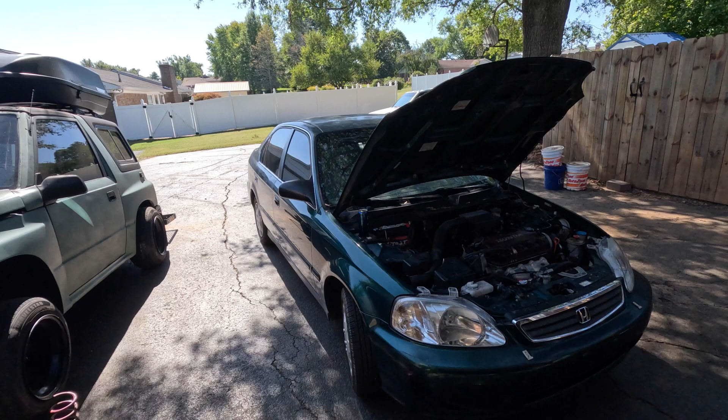$19.99 Honda Civic LX. All right, first things first, we're gonna remove this. Let's get this out of the way. It should just slide right out. Fits in there nicely like a glove. Set this to the side.

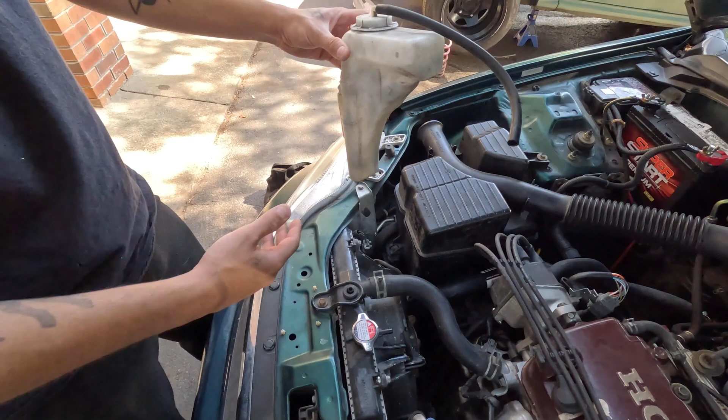Let's remove the upper radiator hose. Get this hose off, line off. Hose off right there. It's not leaking because my radiator's empty. Leaked all out the night prior. Set that to the side.

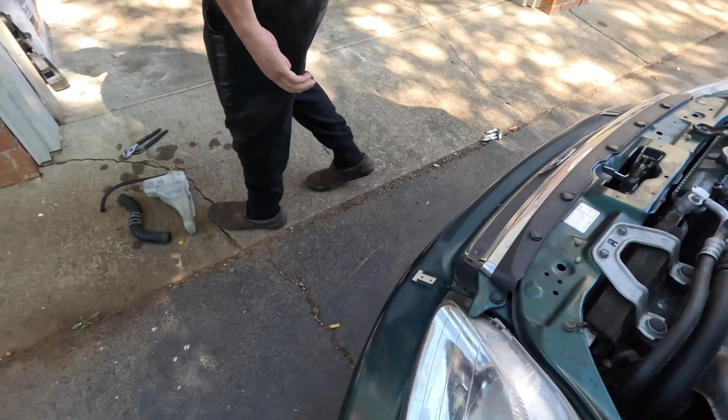Now we're gonna get the lower radiator off, and the lower radiator hose off.

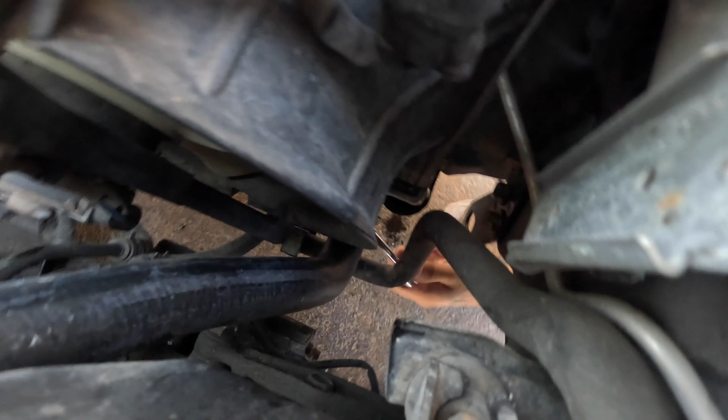I use a hose clamp for this. I don't really like using the ones where you pinch. I like to have this one German specs. Does that make sense? Guten Tag.

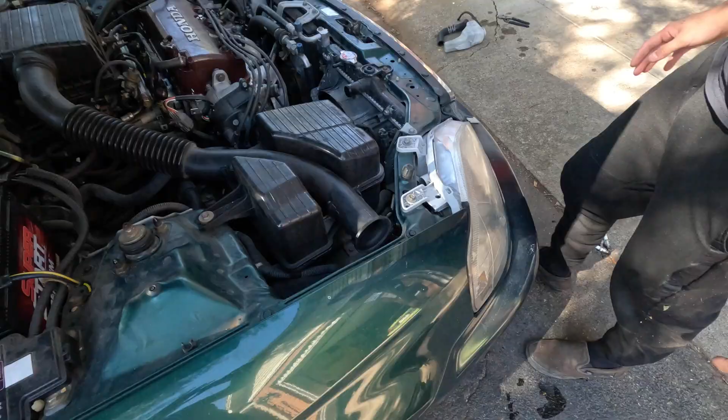Hey, I took the whole thing off. Maybe too much. Oh, son of a bitch! Oh, there wasn't much anyways. It stopped already, I'll be fine. You get some oil dry.

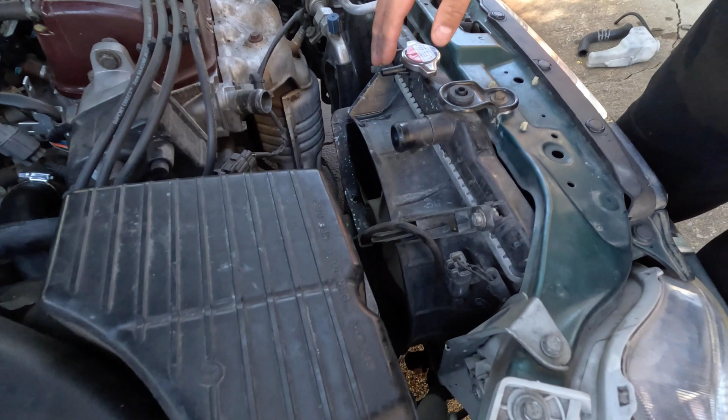So just make sure you got all the coolant out of your radiator before you make a mistake like I did. I thought I drained it all out yesterday, but I guess sitting overnight it just kind of built up. But it's okay, mess is clean.

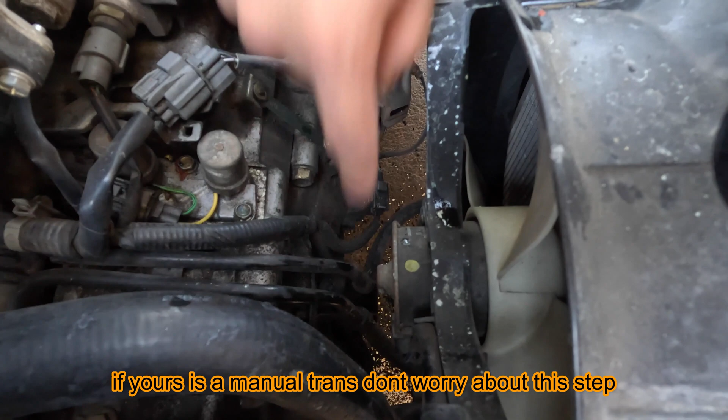So now what we're going to want to do is to see these two transmission cooling lines right here. Let me show you how to go about taking those off and plugging them properly.

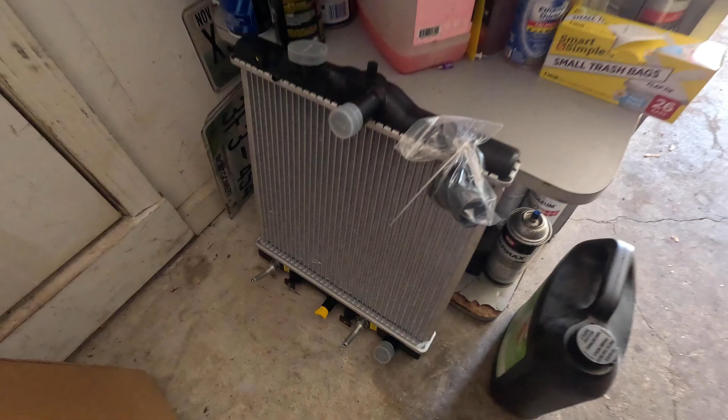Came with a new radiator on here, so it's perfect for plugging that line so you don't leak any transmission fluid. But, I mean, you're gonna leak a little bit, but it'll be all right.

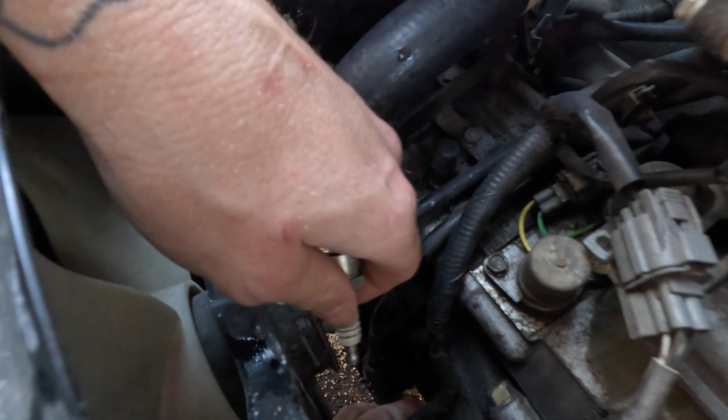Once you get this line off, you want to use a spark plug. What we're gonna do is plug this line right here to keep it from leaking transmission fluid. So I'll let you do that. Yeah, this is gonna be hard. Might lose a little bit of fluid, but that's fine.

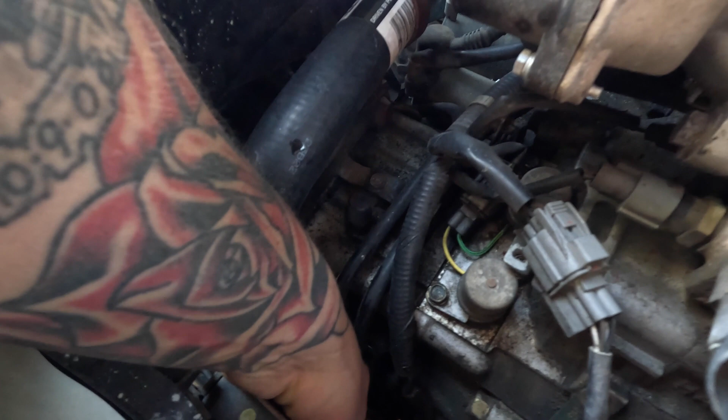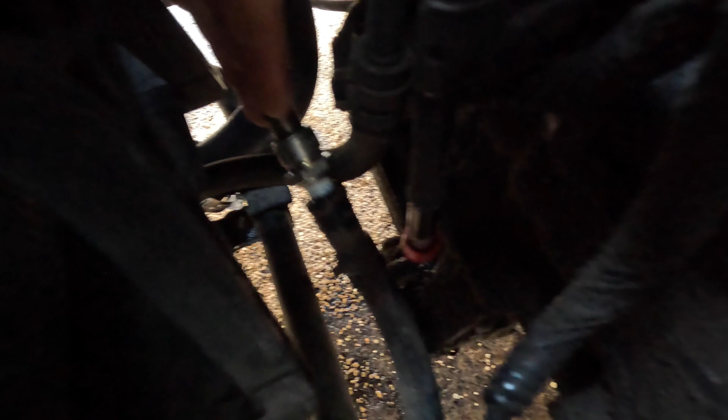And then this cap came with a new radiator. Put this cap along the... like that. First one's done. So what we did is we took the line off, plugged it with the spark plug, and then these little red caps right here came with the new radiator.

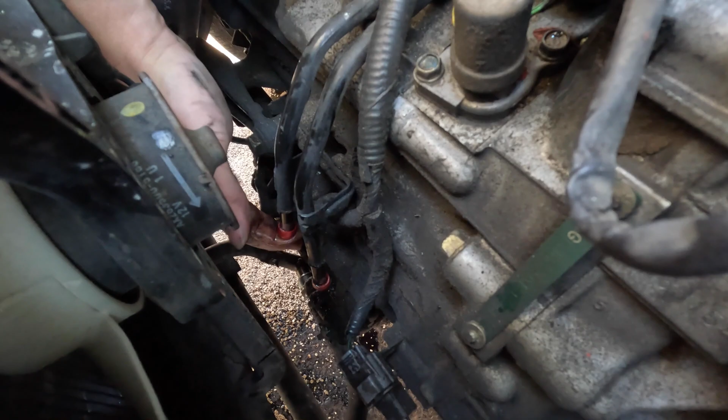Cool, there you go, mechanic. And it's just a little bit of transmission fluid. You'll be fine, but it doesn't hurt to check it after you're done.

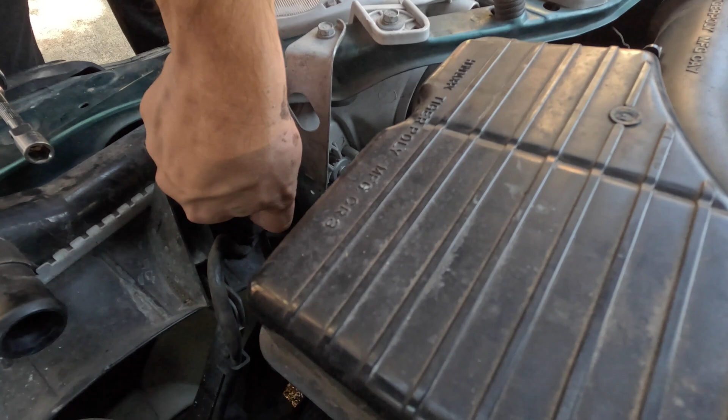So that's also what we're going to be doing. So since we got those two off now, we're moving on to taking this off, which I hate plastic clips. There you go. The only thing holding this radiator in place is this 10 mil bolt right here, but there you go.

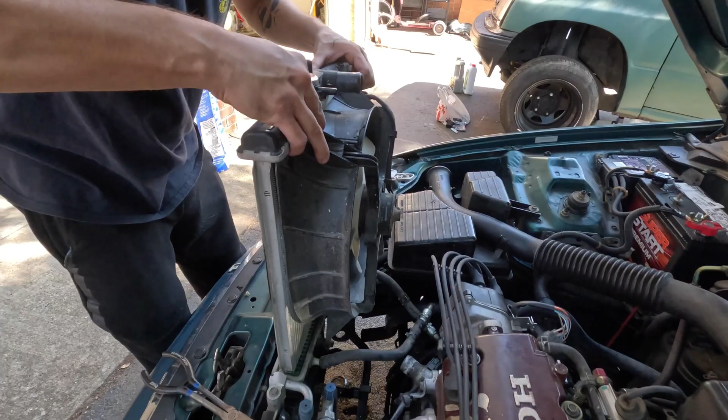Set this aside, don't lose it. And then your radiator should just come right out. Voila. Yep, and she's out. Bam.

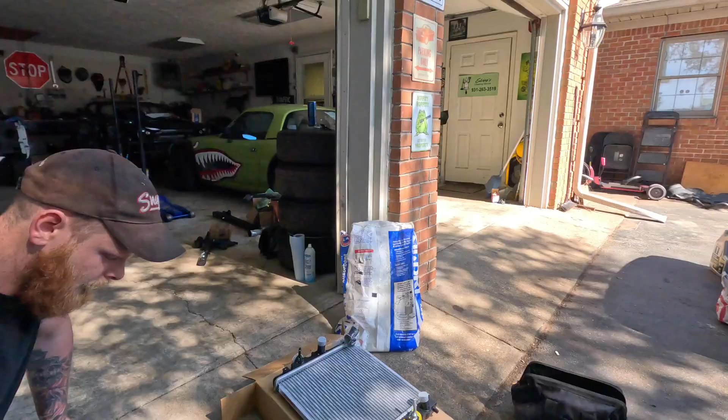Now what we're gonna do is we're gonna basically transfer everything over from this to this beautiful new one. We're taking off the fan right now. Couple 10 mil bolts.

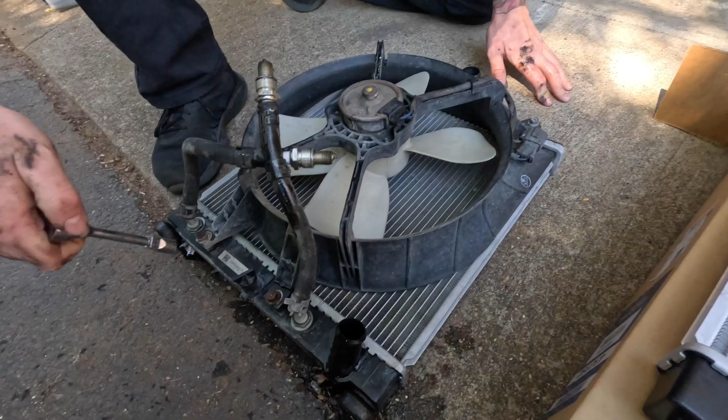Yeah, you can tell that it's been leaking because these are rusty.

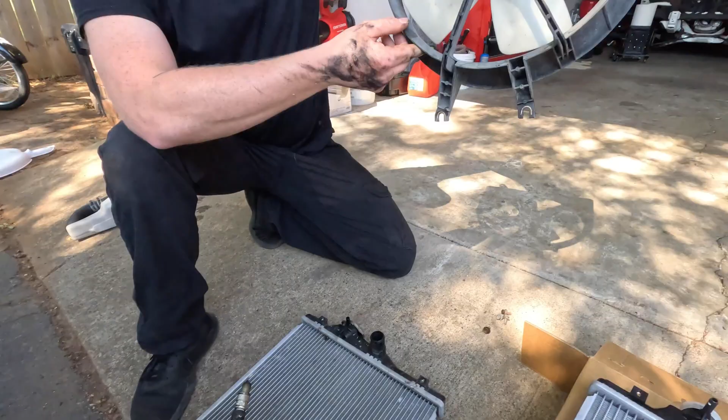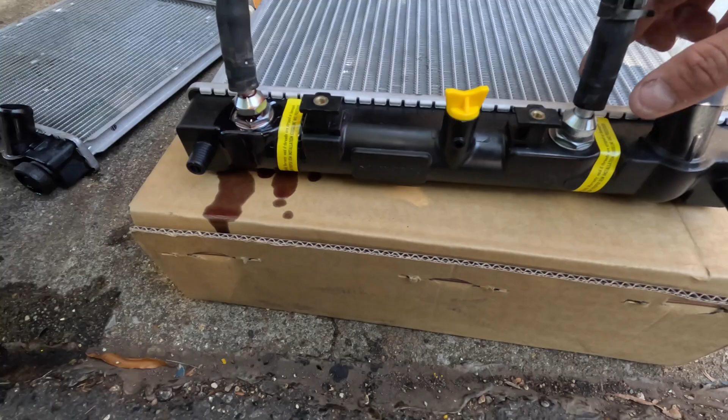So a lot of people, when they tighten these, some people use thread tape. You don't have to, just make sure it's good and tight, German specs, good and tight. And then make sure it's pointing in the same direction as it was when you originally took it off. Just like that. So these are already tightened and had them pointing upwards. We're good to go.

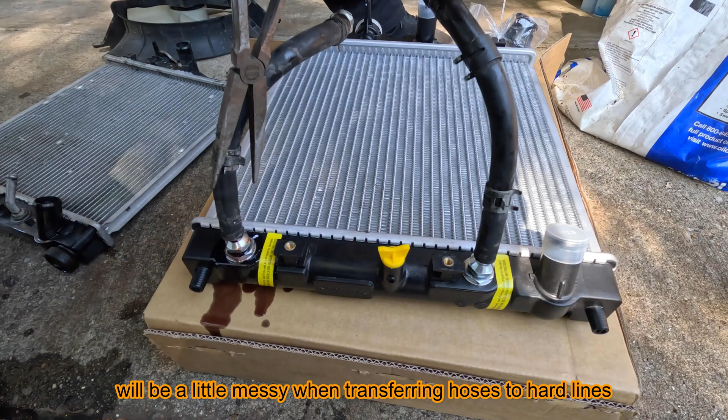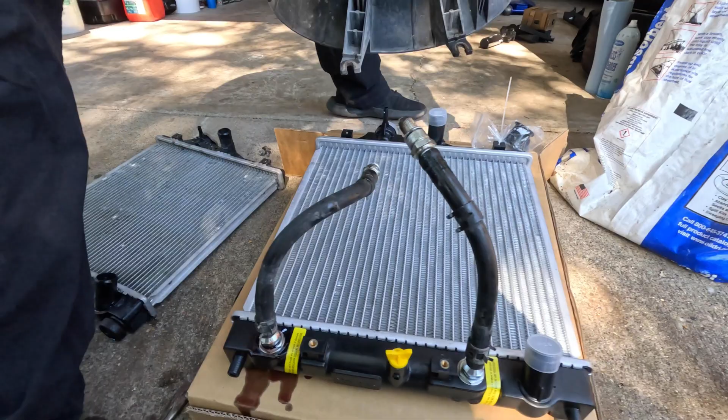German specs. Now I'm gonna install the fan.

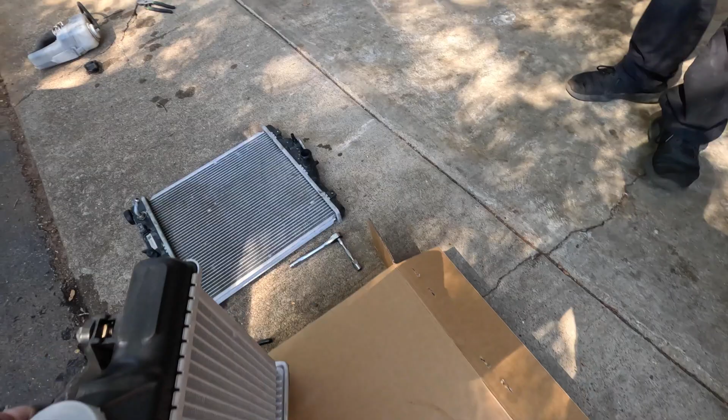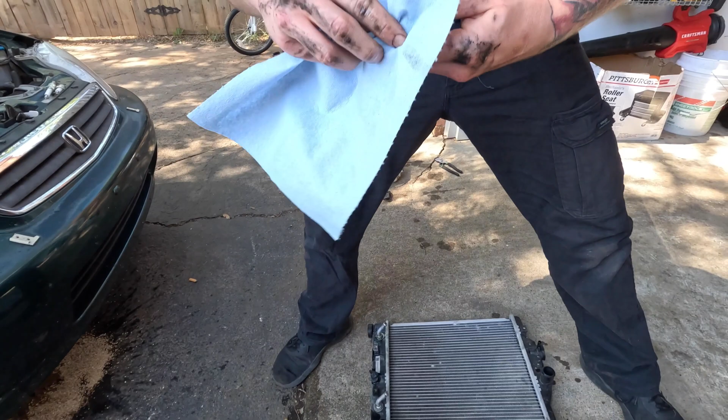And a lot of the times, some of these newer radiators, they don't come with the radiator cap. Can you grab that one off of there for me real quick? So keep that in mind, don't throw it away just yet. There we go.

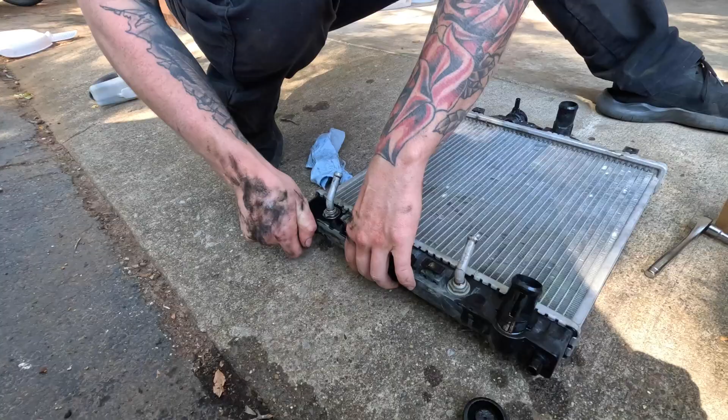And we're going to be using the grommets that were on the old radiator compared to the new ones, because this is what the new ones look like in reference. They're not the same, so we're just going to reuse the old ones.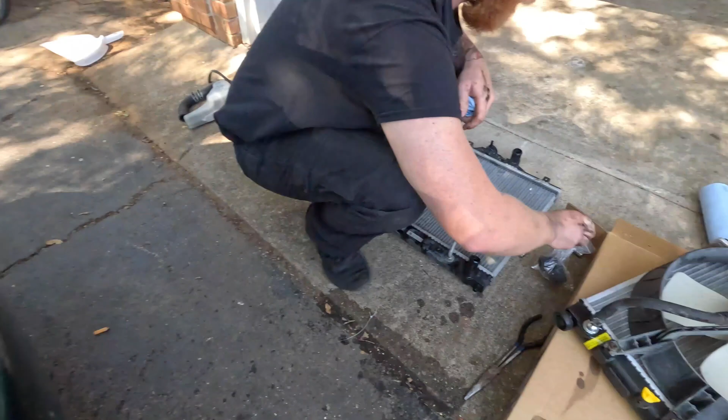Now we're going to go on the install. So those two little grommet things slide right into there. Too easy.

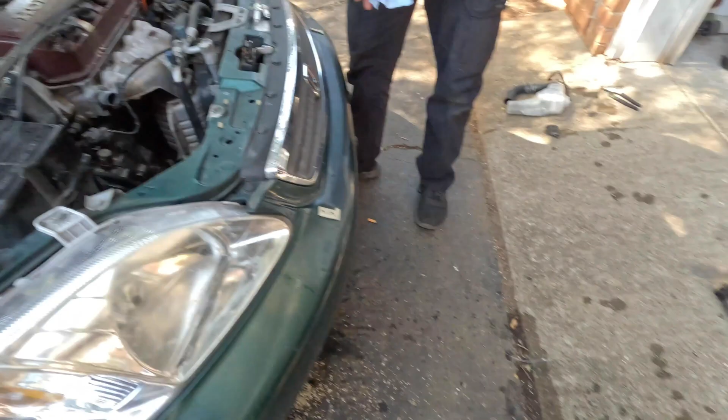So just slide right in like magic, like butter. Let's do it. That side's in, that side's in, there you go. Too easy. Now what we're gonna do is that little, just to hold it in place. Catch that.

Teamwork makes the dream work. Let's do it, let's do it. Save you a few hundred dollars doing it yourself. Save 15% or more by doing it by your fucking self. Watch your profanity. Oh.

Alright, next thing we're gonna get into, yep connect that. I hate sensors and plastic plugs and all that shit.

Next thing we do is to connect those transmission cooling lines. And like I said, if you leak a little bit of trans fluid, that's fine, because we're also gonna check it after this.

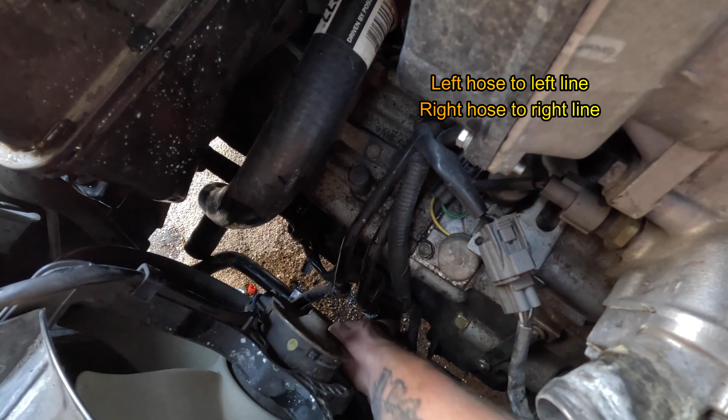There you go, I'm just gonna get the clamps on. Now we're getting the clamps on. Damn, this guy is literally a genius, dude.

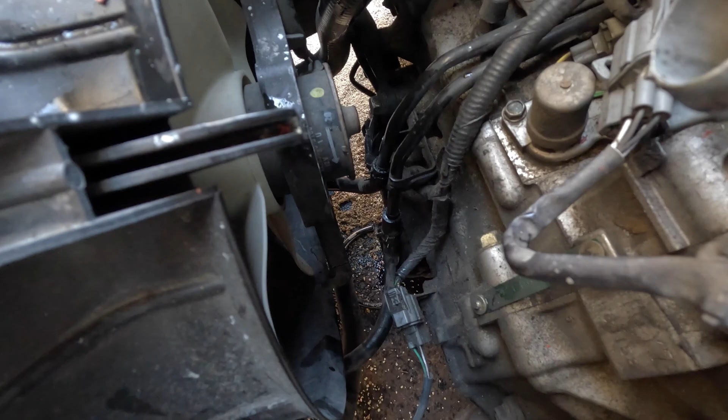I did work as a mechanic for a little bit. Oh, fuck, come on man. Hey, at least it touched the ground - that's all you really look for whenever something falls in the engine bay, you want to hear it hit the ground. There you go, good job.

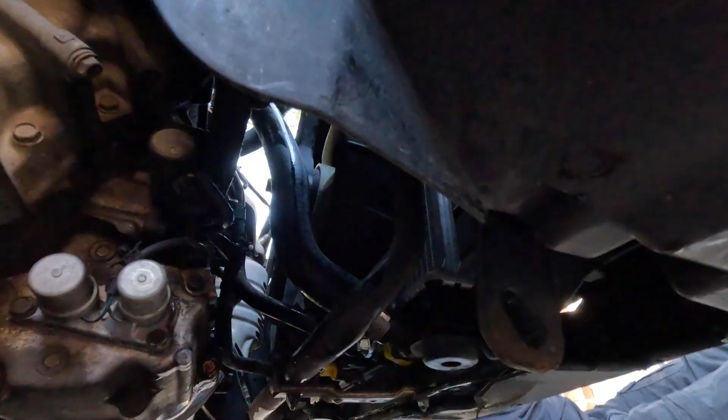And the hoses. Now you're going to connect your upper radiator hose. Good job. And then you go about getting that lower radiator hose on. Make sure you got it good and tight - not too tight, but tight enough.

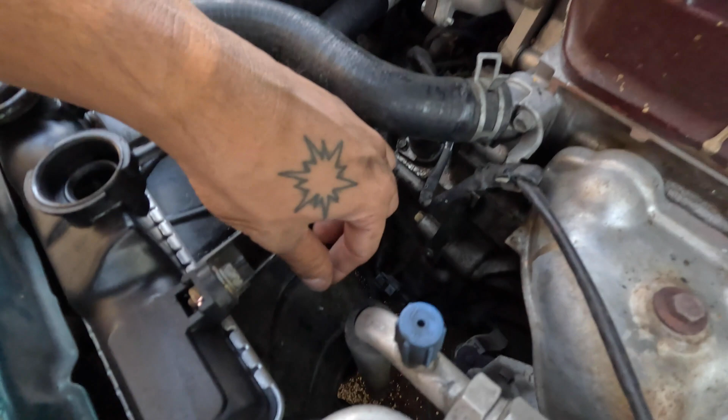Now that we got everything together - upper, lower radiator hose, transmission cooling lines, we got the fan plugged in. It's mounted properly down here, secured and then bolted. What we're gonna do is put the reservoir back in. It just sits nicely right there.

Yeah, it literally just sat in there. Look at that, boom. We're gonna fill it up with coolant and we're gonna burp the system.

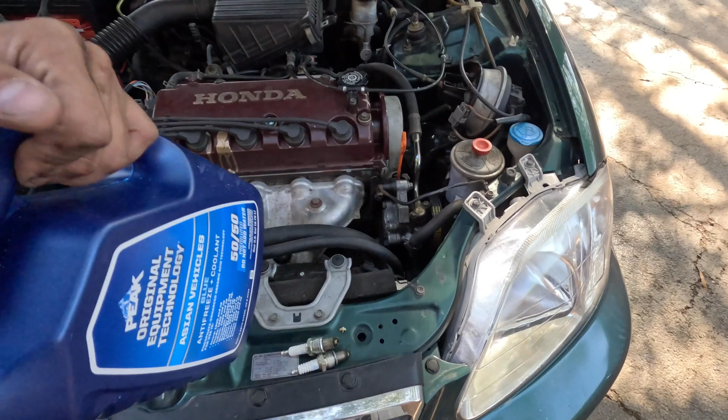We're gonna be using - you don't have to, we're just bougie, not really - but we're using Peak for Honda 1990 and up.

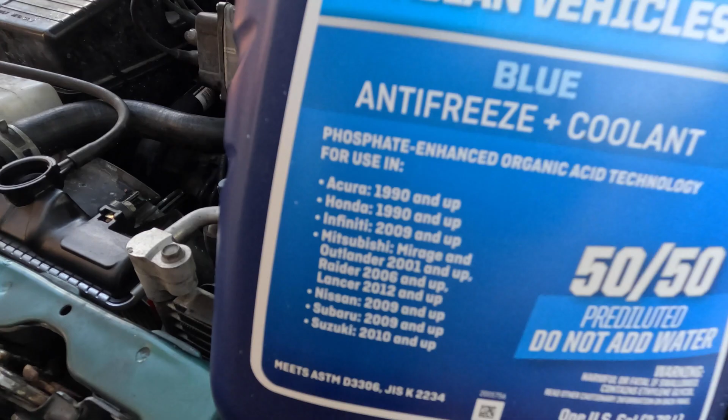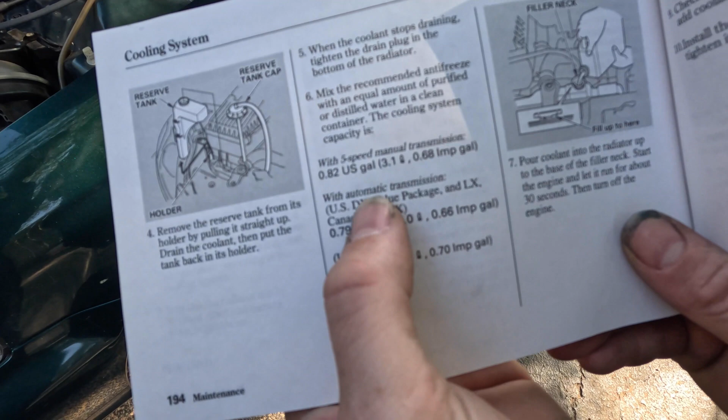As you can see here from the 1999 owner's manual of this Civic, it says with a 5-speed manual transmission and an automatic - this has an automatic - it takes 0.79 US gallons for DX, LX models, and if it's the US model EX, then it's 0.85 for the automatic.

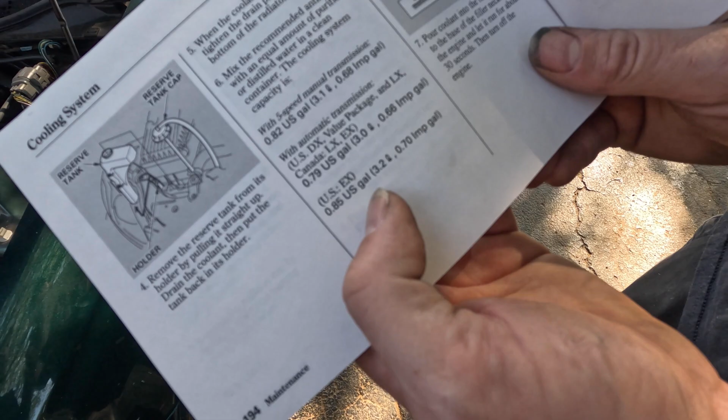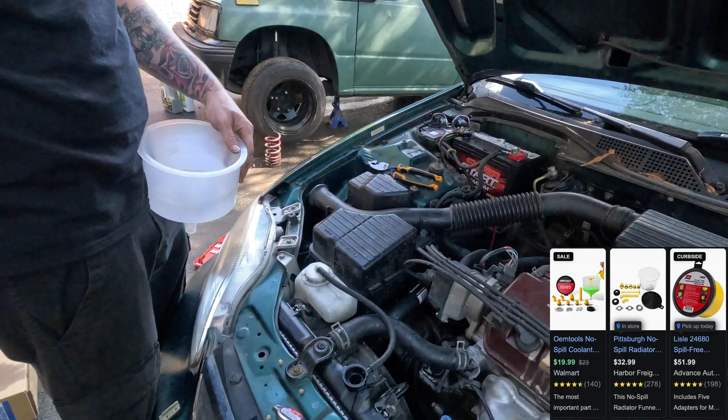But what we do is we fill it up, burp the system. Once it's filled, no more burping, it's good to go. You don't have to use this, but this is what we're going to use to burp the system. It's a lifesaver, it's nice, it's easy, you can do it without it too.

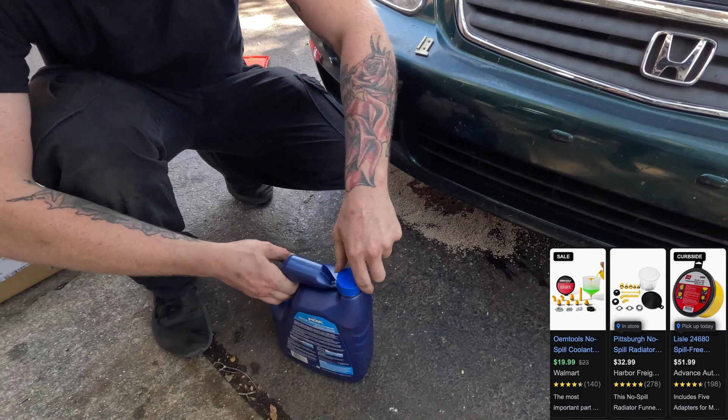Turn it on, fill as necessary, watch for the bubbles. As you do this, also check underneath for any leaks.

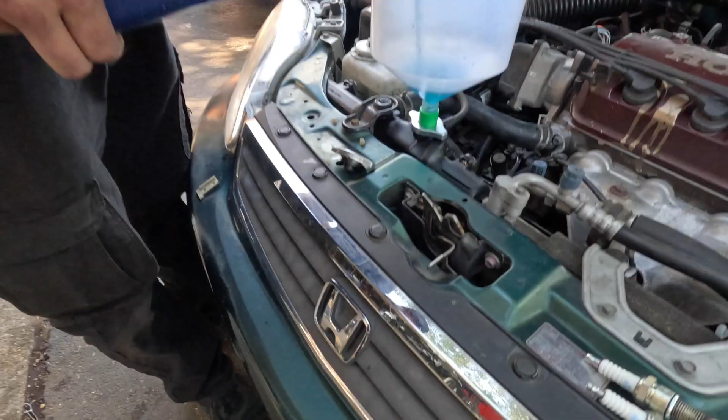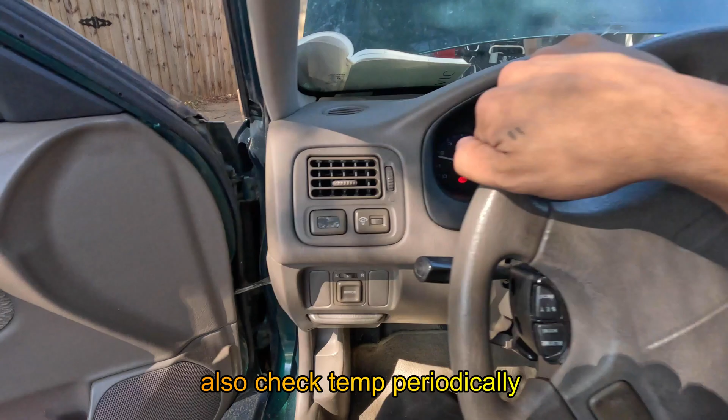So when you're burping the system, you're going to want to turn your heat on full blast. Do you know why you got to turn the heat on full blast? It just expedites the process of burping the system, it helps get the bubbles out a lot faster.

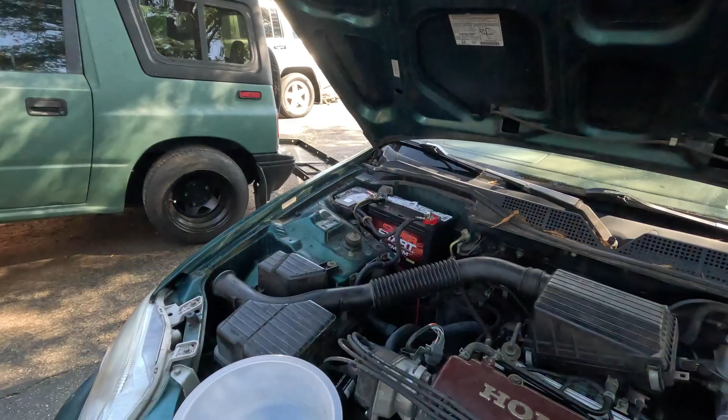Okay, doing its thing, there's bubbles coming out. Don't see any leaks. What's the dog doing?

What you want to do is get it to operating temp, which we're dang near almost there. You can have a buddy or yourself rev it up, and you can tell that it kind of speeds up the process.

This is so much nicer than just doing it from here and letting it get all over the place. So what you want to do is get it to operating temp. You can have a buddy rev it, it helps speed up the process.

Right, revving it helps speed up the process. What it'll do is push the bubbles out a lot more, which will expedite the process, make it go by a lot quicker, which is what I did.

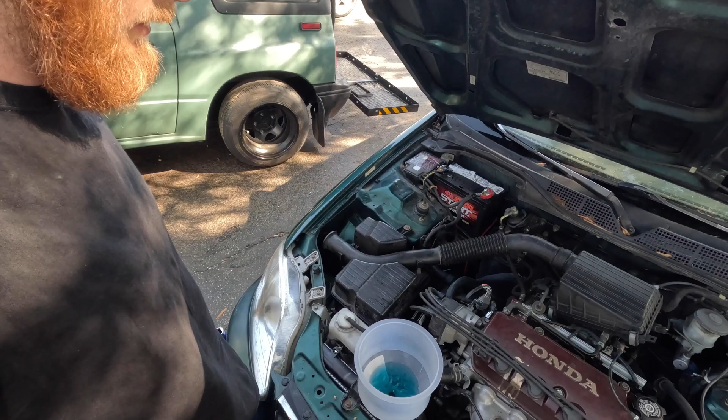Now, it being at operating temperature, we're looking to see if there's any more bubbles, which there hasn't been any in about a minute or so. You say you're good when you don't see bubbles for a couple minutes - you might get a periodic one or two here and there, but that's to be expected. When you don't have an excessive amount of bubbling, that means you got all, if not most, of the air out.

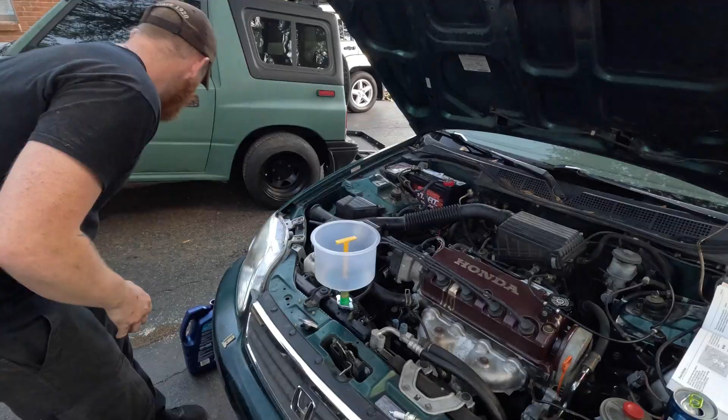I think we're good. Now that we're good, what we're going to do is put the rest of this into the overflow tank. Don't forget to fill that up, and try to keep it as clean as possible.

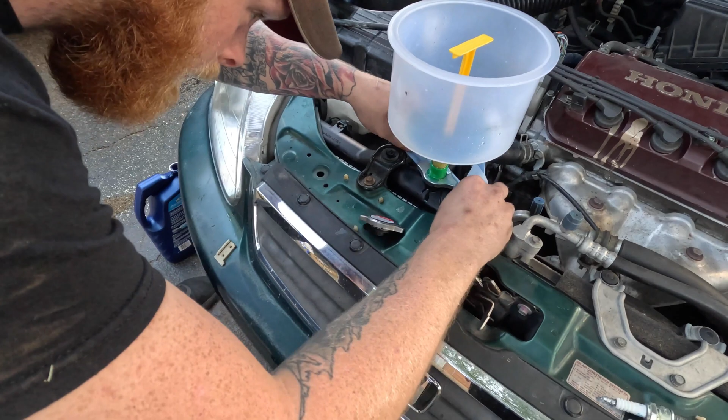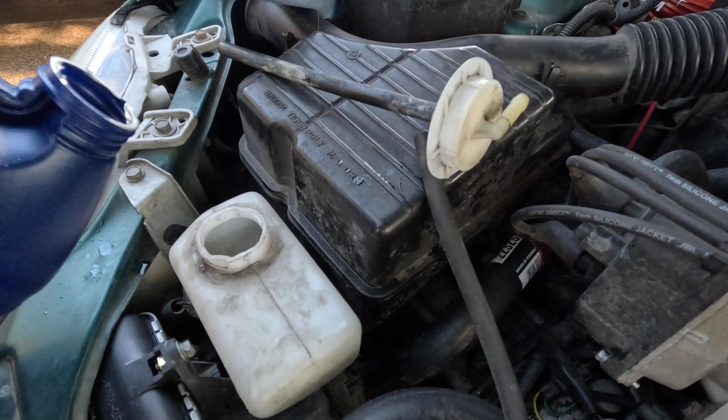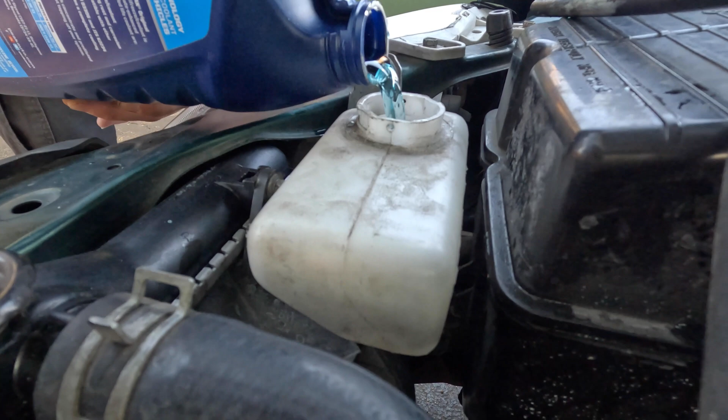I know a thing or two because I've seen a thing or two. Damn, how much? Yeah, I shoved it in there, I'm sorry. I'll let you know, keep it coming, keep going.

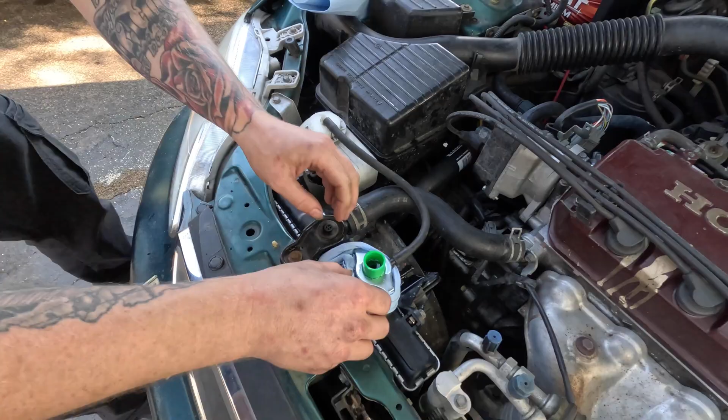Nothing like an old Honda though. Facts, with somewhat low mileage.

And then what you can do, if you want, so when you put the cap in, it doesn't overfill - just let this soak that up.

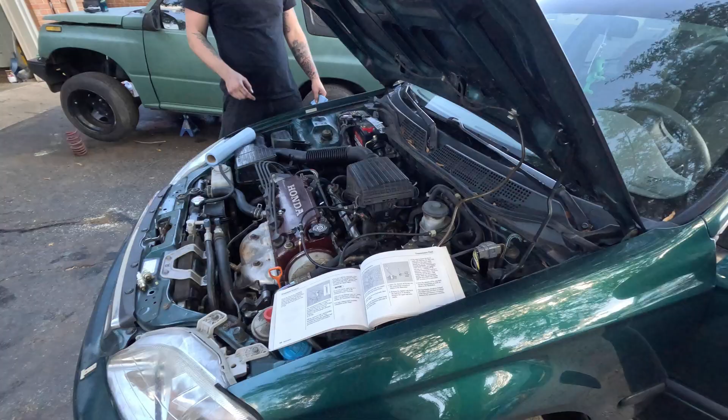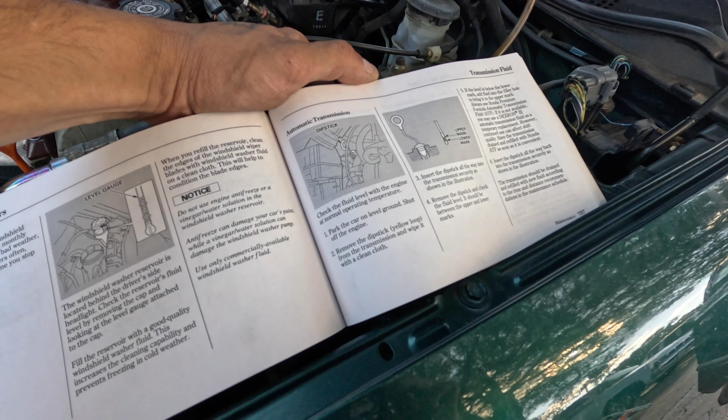In case you were worried about it when you took off the transmission cooling lines - over here in the manual it says check the fluid level with the engine at normal operating temperature, which ours is. You're going to park on level ground, shut the engine off, and right now we're going to remove the dipstick, it's the yellow one, and we're going to wipe it clean.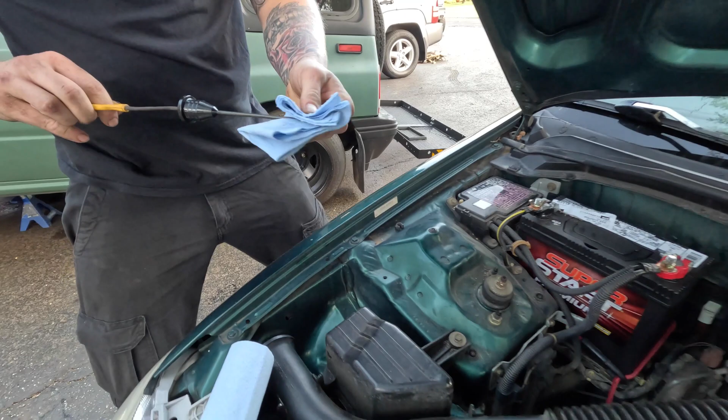Wipe it clean the first time to get an accurate reading. So now he's wiping it clean. And we're going to insert the dipstick into the transmission as shown in the illustration.

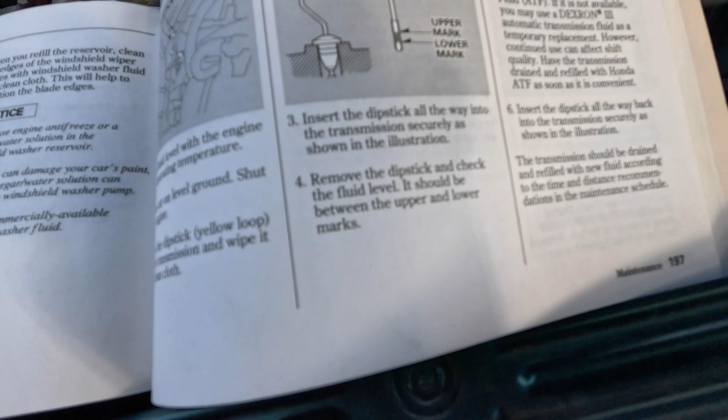Now he's removing it, and now we're going to make sure that the fluid level is between the upper and lower marks. You can see it's roughly right about there, tip of my nail. If I turn that over, it's about where that fill line is, which is where it's at - good to go.

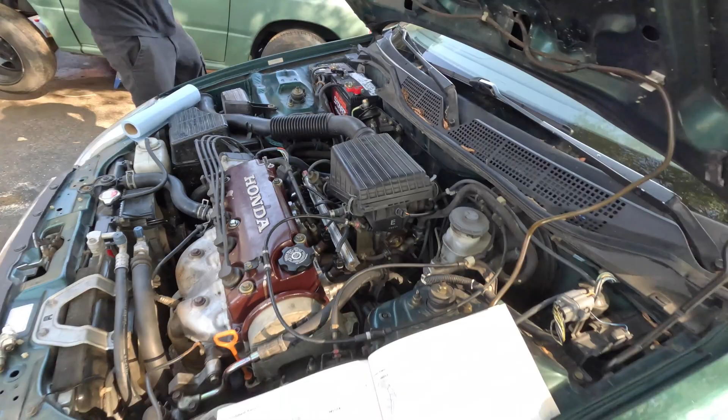And that about wraps it up in case you're worried about the transmission level. If you have any questions, comments, concerns, don't ask me - I'm just kidding, ask me in the comments. Thanks for watching.